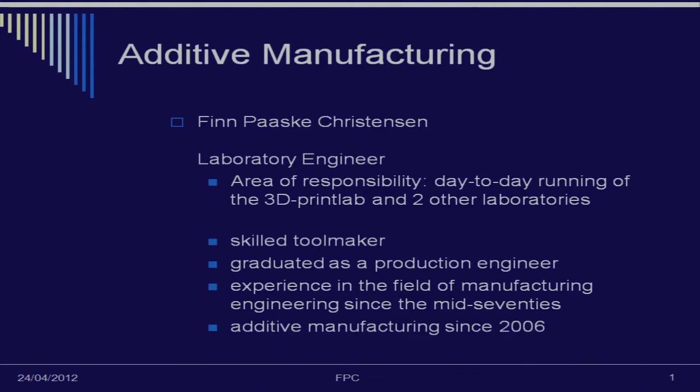Good morning, ladies and gentlemen. My name is Finn Paaske Christensen. I'm a laboratory engineer responsible for day-to-day running of the 3D print lab and two other laboratories. In the late 60s I was a skilled toolmaker, and I graduated as a production engineer. My experience in manufacturing engineering goes back to the mid-70s, and I've worked with additive manufacturing since approximately 2006.

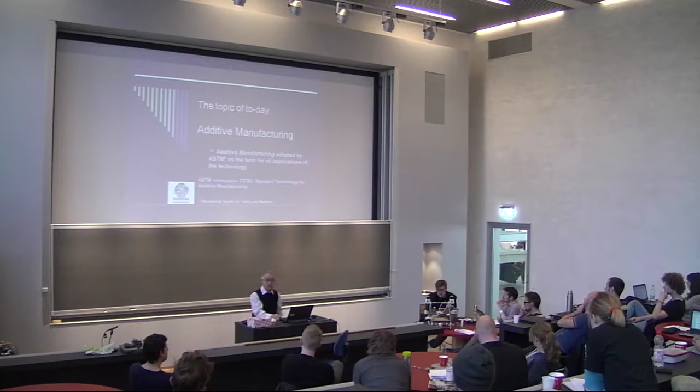I don't know what topic you've called this until now, but I want to emphasize that we call it additive manufacturing. This term was adopted from ASTM, the American Society for Testing and Materials, which decided to call it this, and this is the expression we will use going forward.

Oh, the mic. I'm not used to using this, so in fact it's the first time I've spoken in such a large room. I normally teach in very small groups of 4 or 6 persons, in Danish. So if you can't understand me, or I can't understand your questions or hear them, you'll have to apologize.

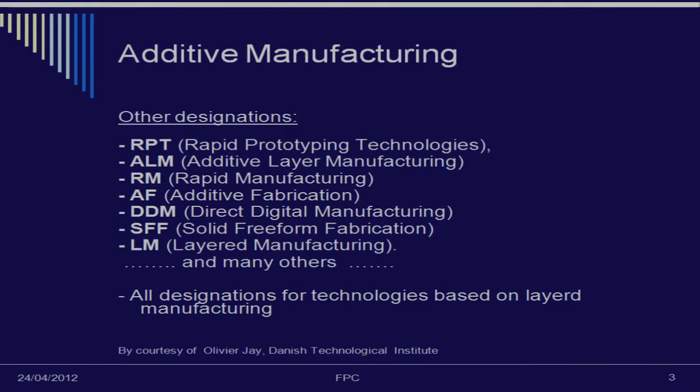These expressions, as you can see here, you will see lots of other designations, as the examples show. But all these designations are technologies based on layered manufacturing.

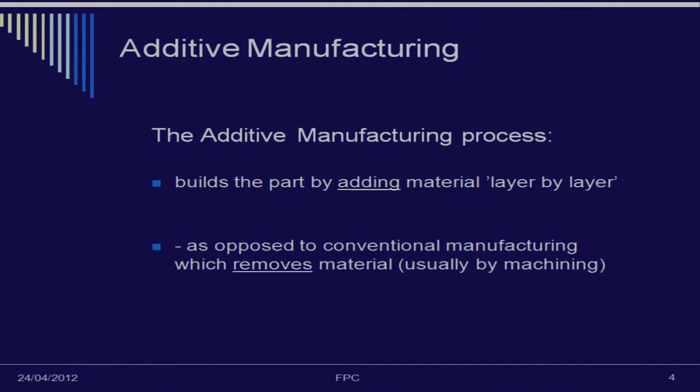To emphasize once more, the additive manufacturing process builds parts by adding material layer by layer, as opposed to conventional manufacturing, which removes material, usually by machining.

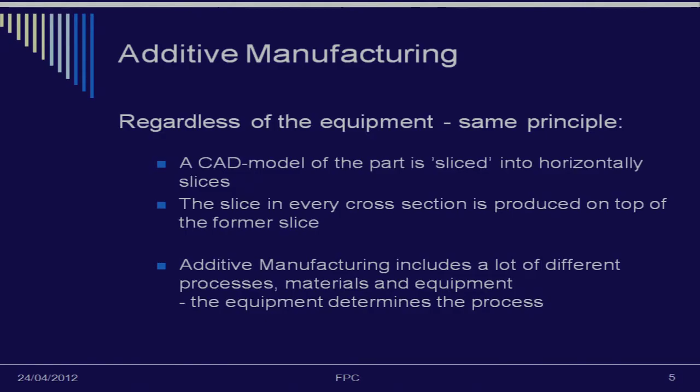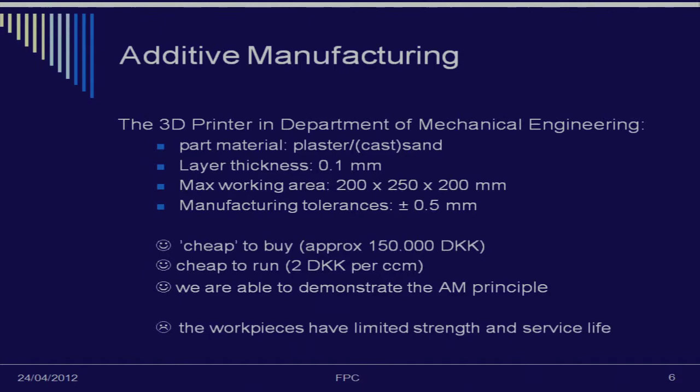In the Department of Mechanical Engineering, we have 3 different types of machines and processes. The first one we call a 3D printer, and it's really a 3D printer, because this process is called 3D printing.

The part material is plaster. Most of it can also work with sand, but we have only used it with plaster. The layer thickness is around 1/10 of a millimeter, and the working area is 200 by 250 by 200 millimeters maximum.

The tolerances, I have mentioned, are plus minus 0.5 millimeters. We have achieved better, but I prefer to keep to these plus minus 0.5 millimeters.

This machinery was relatively cheap to buy, around 150,000 Danish kroner in 2007, I guess, and it's rather cheap to run. The material and other costs are 2 Danish crowns per cubic centimeter. First of all, we are able to demonstrate the additive manufacturing principle with this machinery.

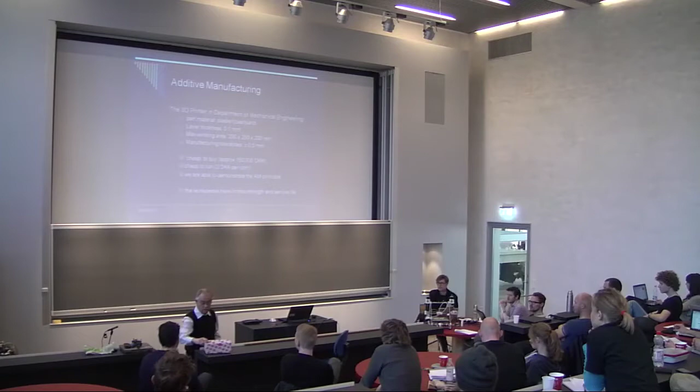Unfortunately, the work pieces have limited strength and service life. Maybe you can, at least these are a few examples, and maybe you can investigate them.

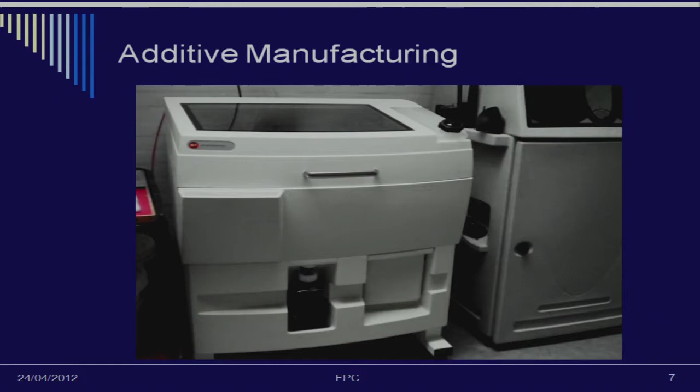The machinery looks like that. In that box we have two chambers, two areas. The left one is the material chamber, and the building chamber is here.

The process is that a liquid adhesive is dosed onto a thin layer of plaster, and it goes through the nozzles of a printhead installed in an XYZ system. This glue binds the particles together. Then another layer of plaster is deposited on top of the first one, etc., and these layers are self-supporting.

If we go back one, here you have a detail which, if it was a liquid material, you couldn't do. But here you have some plaster.

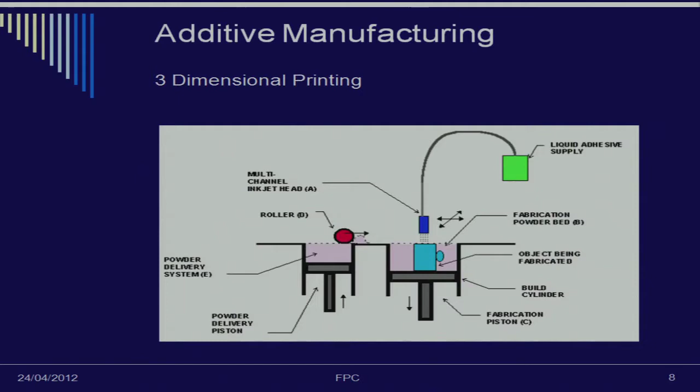Here, here you see the plaster with no liquid supporting this detail.

After the model is finished, in our machinery, you have to keep the model in the machinery for 1 hour, just to let all the moisture out. The temperature in the machinery is around 38 degrees centigrade, and some of this moisture will evaporate at that time. If you remove it before this 1 hour, the part will break.

Of course, there are a lot of other processes in use, for instance laser light, producing work pieces of polymer and metal, but that's all for our machine, one of them.

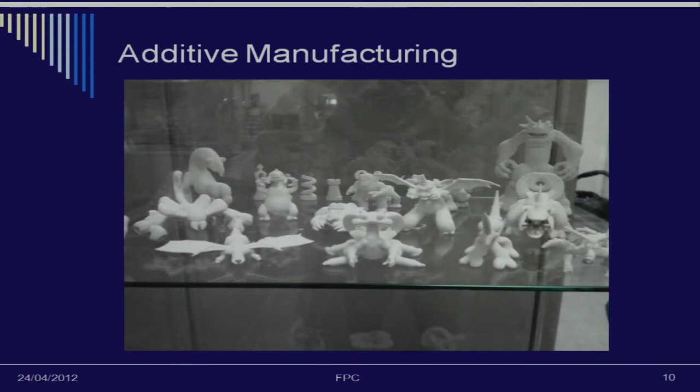Some examples, and if you go through building 427, just before the yard, you will see some of these examples, these figures from the game called Spore. Spore figures, yes. We also have these kinds of examples, but you can see for yourself.

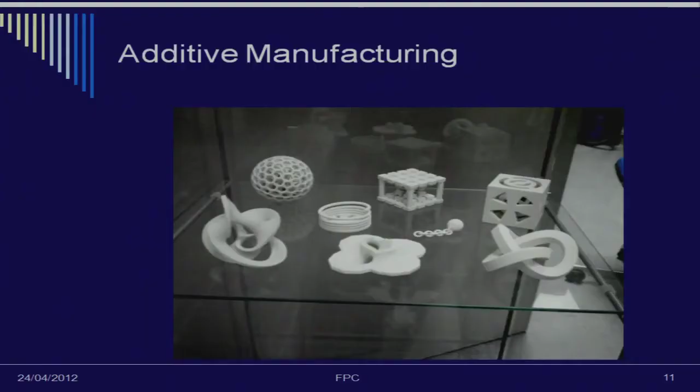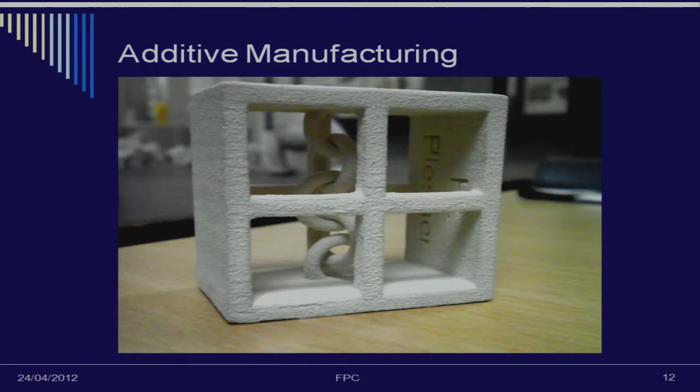As you can see, you can make some things that you can't make in any other way if you didn't use this additive manufacturing. You can see this chain is free, but it is fixed in this cage.

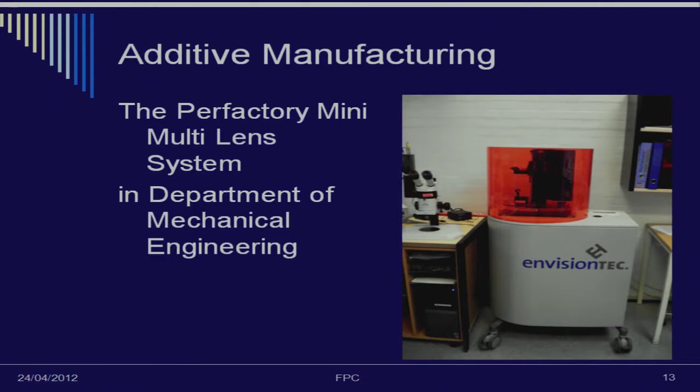The next machine has a very large name, the Perfactory Mini Multi Lens System, and the company is called Envisiontec, and it looks like that. You have to hide the working area behind this shield because it works with liquid plastic which cures with visible light.

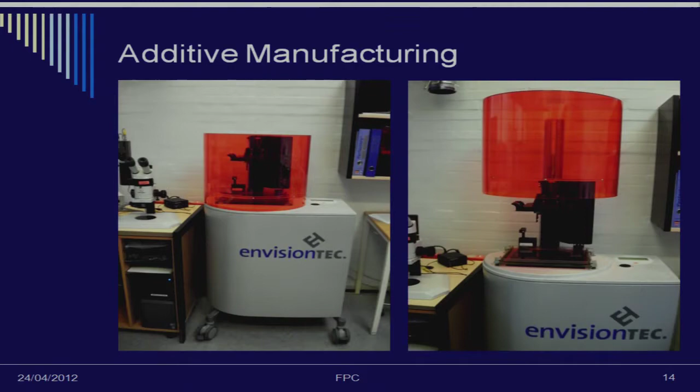It's very hard to see, but here up you have a build plate and it is immersed down in this basin with liquid photopolymer. And from the bottom, in here you have a big system with lenses, and the light goes from bottom and through the plate, as you saw, and then the model is cured from the bottom.

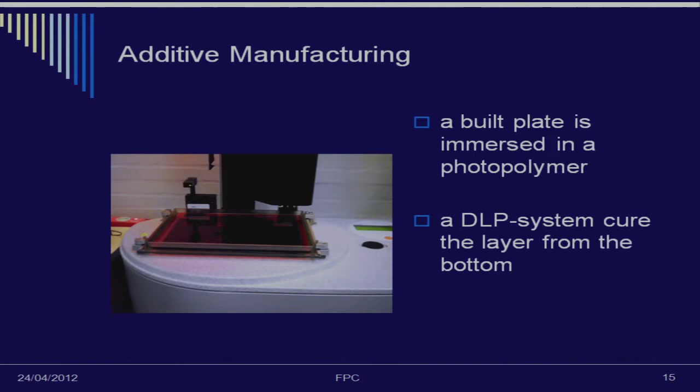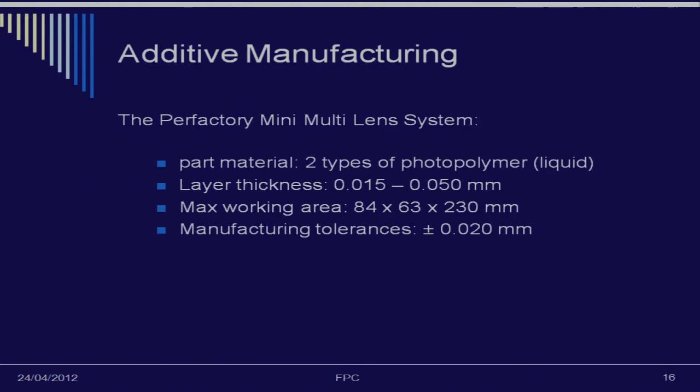And then you can make parts of the maximum size 84 times 63 times 230. That's the maximum, so it's very small.

The layer thickness is from 15 to around 50 microns, and the tolerances are plus minus 20 microns. And that's the advantages with this machinery. It's expensive to buy, more than 500,000 Danish kroner. Expensive to run. The material costs around 3,000 kroner per kilo, and the process is comparatively slow.

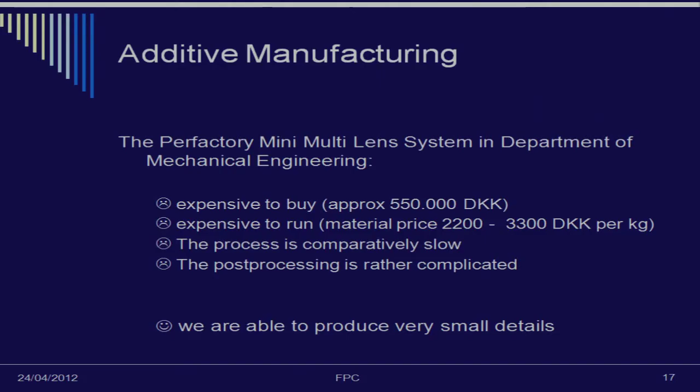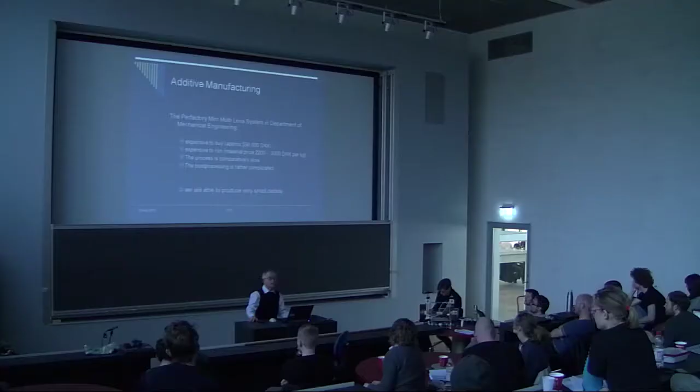These kinds made in this way took around 8 or 9 hours. But yeah, and the post-processing is rather complicated.

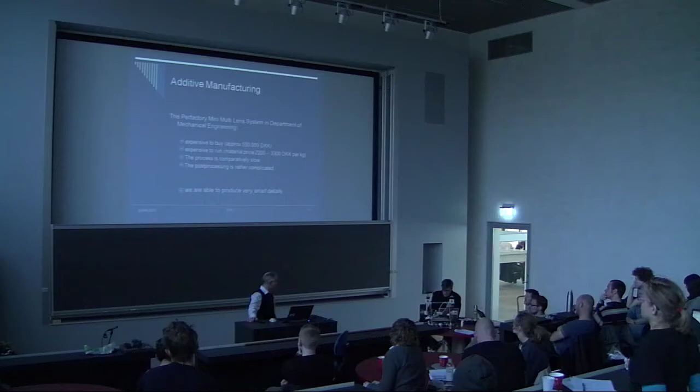You have to work with IPA and some other equipment, which takes very long time. But we are able to produce very small details, and that means features down to around 50 microns in X, Y, Z. And that's why we bought it.

And here you see an example. Well, now I know I forgot this. I have some models like these for the ears, and every manufacturer of hearing aids in the world, they use this method to make the shells, as you see here.

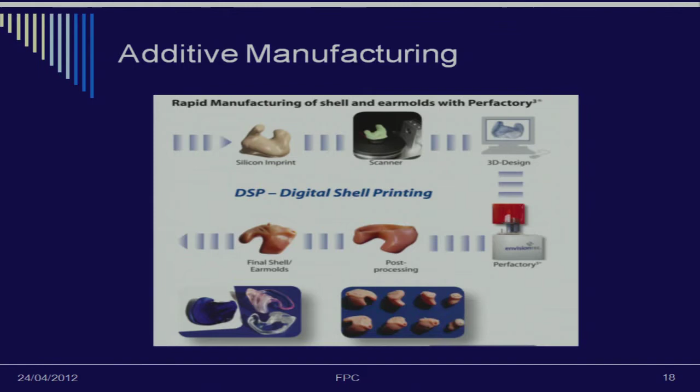You start with an imprint of silicone of the ear, then you scan it, then you can make your files for the process. Then you have our Perfactory machinery, and the post-processing for the surface and the final shell, install the equipment, and here you can see you can make 8, 16, 38, up to a couple of hundred of these shells in the same process. So that's really an advantage.

And here you see the finished parts. Well, that's all for my talk. So, have you any questions?

Yes? If we have a product that we would like to have a prototype made of, is that possible? It depends. It's small. A very small one, and should it be in plastics or in? Doesn't really matter.

Just we need the functional outline of it. Well, as maybe you can understand, our plaster models can be used for limited function models, and the plastic models are better for that. But we will prefer to make the models in plaster because it's much easier process and much faster. So, and there are some constraints that if you have an assembly, you have to make it in one part, otherwise it falls apart.

I always say let's see the file and look at it, and maybe sometimes we can downscale it if it's too big. Many times it's too big for our machinery, but we can downscale it if it's okay. But let's look at it.

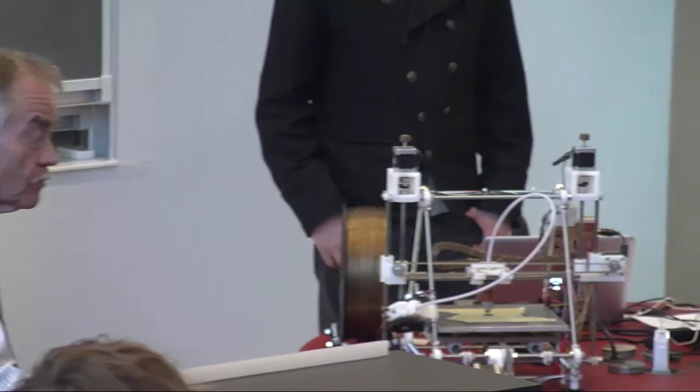It's on the internet. You can find plans for making 3D printers using components from old printers and things like that you can access. Did you make this yourselves in house? Well, that's David's talk.

So maybe he will take over. But I think it's fair to say that you can produce some parts and then have them interface with other components. You don't have to rule out the mechanisms completely. These types of printers work with mechanisms. You can get the parts to engage with each other, also engage with metal or physical parts. Just because your device has a mechanism doesn't mean you can't use rapid prototyping for some elements of it. Is that fair to say?

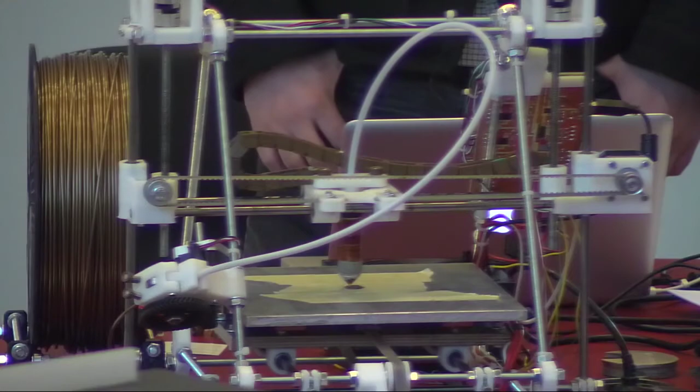Yeah. Well, thank you very much, Finn. Thank you for your talk. You're welcome.

So now, I think we're passing over to David Pedersen, who I've just come into contact with in the last 6 months and realised he's a bit of a genius when it comes to rapid prototyping. He seems to make all these things himself. The ones that are available on the internet don't work half as well as the one he's built himself.

So he's really a man in the know in this respect. So, thank you. To do something a bit different, I won't bother you with a PowerPoint. Instead, I will take you on a little tour on the internet, talk about what's going on in the different communities working with additive manufacturing processes, and show you guys what you can do if you feel that our facilities at the university aren't good enough.

First of all, let's assume you have a brilliant idea. You want to make your own design of, let's say, a phone cover for an iPhone. We should be able to produce that for less than a few hundred Danish kroner, to be able to sell it to anybody who likes our product. And of course, it should be something that we can realize easily and get out to customers, preferably worldwide.

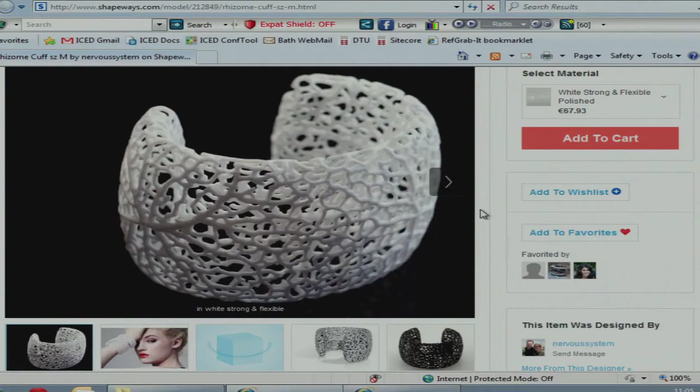Of course, there's also jewelry. Some of them are quite intricate and detailed. And it's really amazing that for a price that is often less than in the jewelry store, you can get your things made in a variety of noble metals such as silver, titanium, and so forth.

So this is a place for you to go if you want to use additive manufacturing technologies in your designs. You want it fast, you want it printed professionally, and you want it cheap. And of course, if you want to start up your own business, this is a quite clever way of doing it.

Now, you are not automatically committed to share your idea. You can make a design, upload it, and say this is for me only. Then they will print it only for you, and it will not become available in the store.

Now, what if you're sitting there thinking, why can't I have a printer back home, like my paper printer? Why can't I have a 3D printer? Well, of course you can. You can have a machine like the one running over here.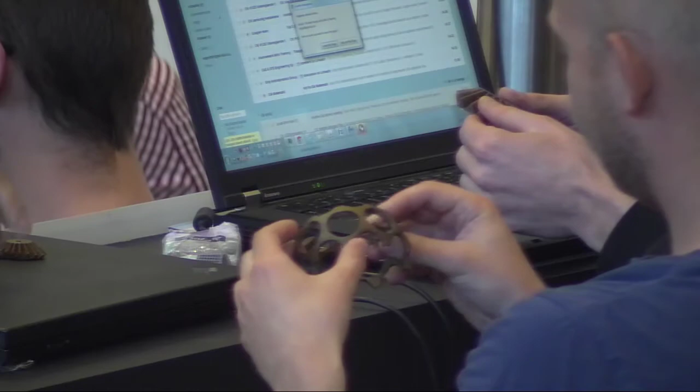Building a little polymer-based additive manufacturing system costs less than 1,000 euros. And the parts we can make on such a machine are quite rough, but nonetheless, for prototyping or for making spare parts for your home—if you've lost the battery cover for your TV remote or whatever—these small machines work quite brilliantly.

Most of them are based upon an open source project called RepRap. RepRap is an abbreviation of self-replicating rapid prototyping machines. Basically you can go to reprap.org, and there you can find all the documentation for building a machine yourself—the electronic designs, the hardware design, and all the software you need to get up running.

If you choose reprap.org as your entry point to this home printing technology, you are really starting up a hobby. You don't get a machine that is running—you need to first build it yourself. After you've spent weeks, if not months, building your own machine, you need to learn how to run it, and that is a quite steep learning curve. It takes a while to figure out how to actually get the machine to print anything.

So if you like DIY projects, like mingling about with tools on the kitchen table, this is the way to go.

If you want a home printer for roughly 1,000 euros and don't want to bother figuring out how to build it or get it running, you can also buy these small machines, or commercial derivatives of this platform, as a kit—a bit like when you buy IKEA furniture. You will get a big flat package, and inside you will find an Allen wrench, and you will start assembling it following simple assembly instructions.

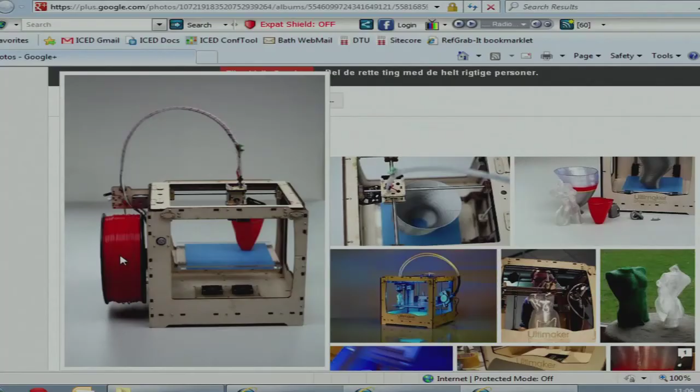It uses a 3mm filament on a spool. It costs roughly 500 Danish kroner for a spool, and it lasts pretty much forever.

Some of these small hobby machines can print in different colors. They have multiple print heads threaded with different filaments in different colors, so you can make two or three color parts as you're printing. Especially this Ultimaker platform is a no-nonsense platform—it's a matter of assembling it, and then it's just as easy to start up as a paper printer.

That's a bit about how you can get started with these technologies if you don't want to directly involve DTU. You can either go for the Shapeways method, which is a complete no-nonsense method—you don't have to think about what you're doing, just produce the CAD file and pay a small fee. Or you can find yourself a new hobby, get your own machine back home, and start printing all sorts of wonderful stuff.

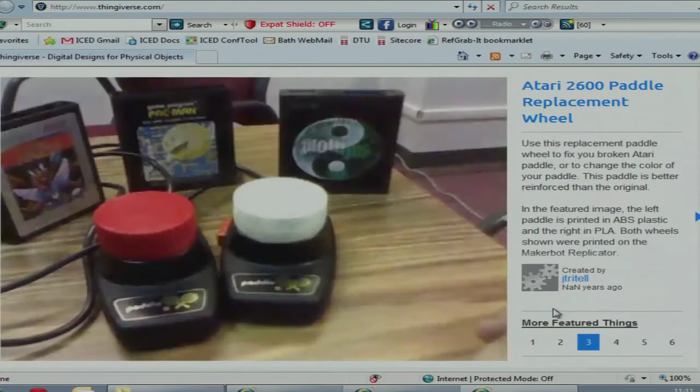If you want inspiration for what to print, there's another awesome website called Thingiverse. Thingiverse is a place to share designs. The idea is basically, if you have made something you like and want to share with the hobby community, you upload your CAD file. There are some featured parts on the front page you can browse through and see.

There's actually quite a big community out there getting all sorts of crazy ideas. What I really like about these technologies is that once you have a machine available, you really start producing your wonderful designs. If you don't have any manufacturing technologies readily available, all the ideas stay in your head and never really get manifested in any way.

But as soon as you have your own 3D printer, or know somebody at the dorm having one, or know a nerd like me who actually spends his professional career playing with these machines, you can realize your wonderful designs in a matter of hours. That's really where this technology wows people—when you go from CAD model to a physical part in a matter of one or two hours.